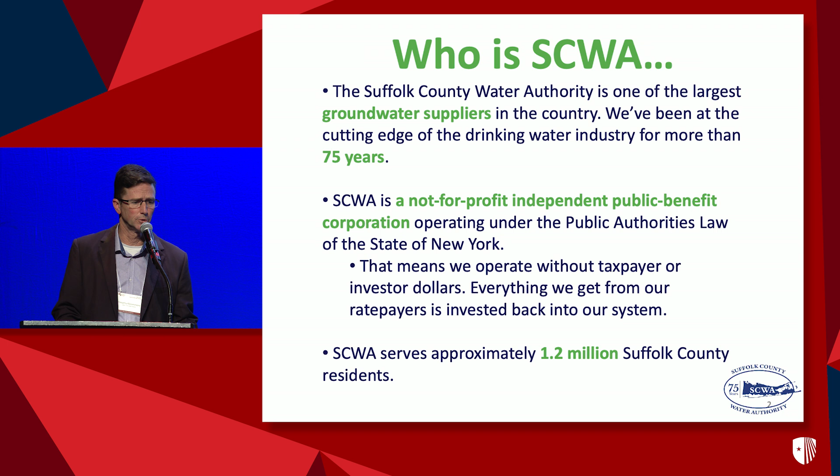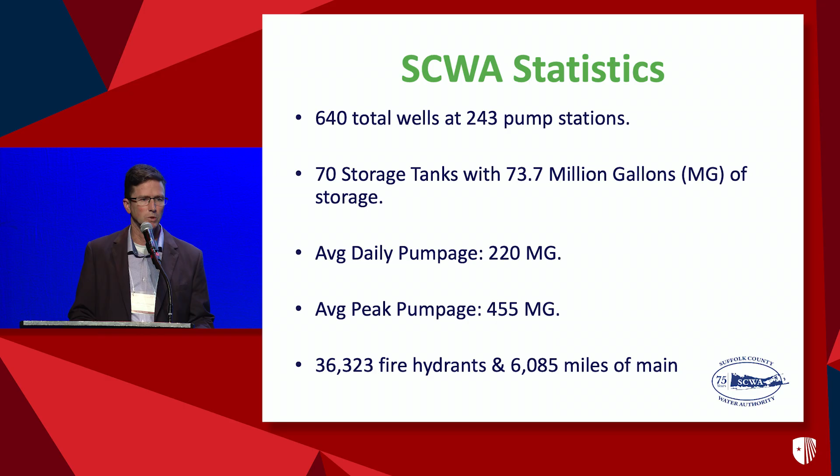We do serve approximately 1.2 million residents. The size of our system, we're a large system. 640 wells at over 240 pump stations. We have a total storage with our tanks of almost 74 million gallons, average daily pumpage of 220 million gallons. And like every other water supplier, we have an average peak pumpage that's much higher than that due to irrigation. It's 455 million gallons a day. We have 36,000 hydrants covering 6,000 miles of water main. So, like I said, very large system.

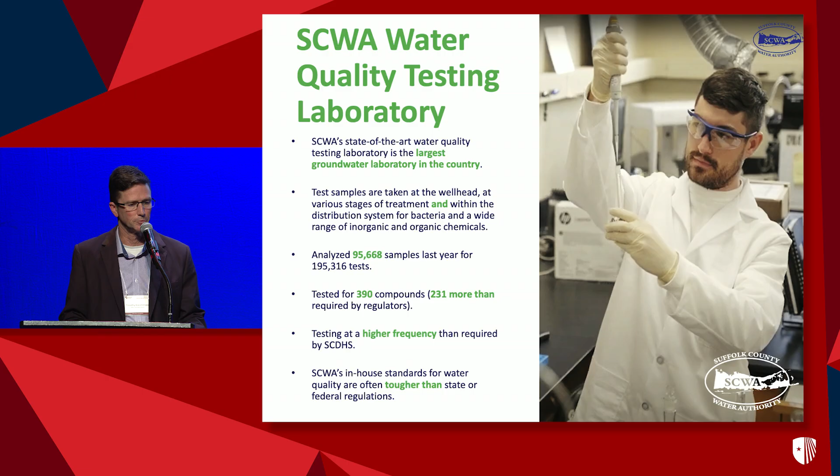So how do we ascertain our water quality? Well, we have our own laboratory, the largest groundwater laboratory in the country. We test and sample at head of pump so we can see what exactly is in the raw water, what's in our groundwater. We test at various stages of treatment, if we have treatment at that site. And we're also testing post-treatment before we go into the system, and finally in the distribution system itself. Our lab processed 95,000 samples last year. Over 195,000 tests were performed on those samples. They're open 7 days a week, 365 days a year. We also test at a higher frequency than we're required to, and our in-house standards in many cases are stricter than what we're required to have.

So specifically on our action on PFOS and PFOA, we began testing back in 2013. The health department, as you know, 10 parts per trillion is the standard for both PFOS and PFOA. The EPA has since proposed a level of 4. We moved right away to try to meet that new proposed lower standard. And so we tried to formalize a plan and have successfully executed it in that we have a mix of treatment and operational restraints that have us in full compliance already, years ahead of the EPA suggested deadline. It went from 2029 to 2031 recently as a proposal.

I would also like to point out that as important as the focus on contaminants is, and it's extremely important for the public and for us as water suppliers, we also need to be able to balance that by letting our customers know that the water is generally safe. And towards that end, 2/3 of our wells, of those 600 some odd wells, don't require any treatment at all at this point.

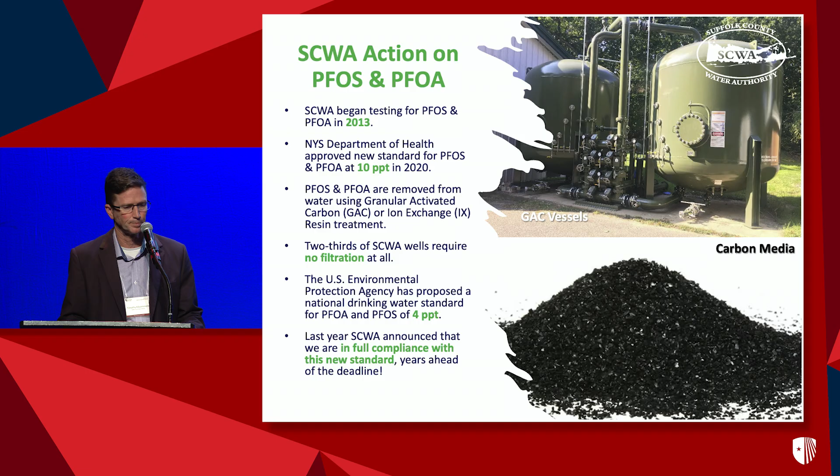So in rolling out our PFAS treatment, we rely on institutions like CCWT and Stony Brook for some of the research that they're doing, but also on our in-house expertise. We have a mobile GAC system that's pictured here after a recent repaint. Those are 8-foot diameter vessels. We've used them in the past for carbon treatment of VOCs and things like that. We sent that out to one of our sites with the highest levels of PFOS and PFOA in the beginning, and we tested different carbons. Real world, let's see exactly which one is going to work best for us.

We've done a lot of carbon research and had kind of standardized around coconut for most things, bituminous for some things, and quickly learned that we were going to be swinging that back around towards virgin bituminous for PFOS and PFOA. So once we had established that bituminous was the way to go for us at this site, we installed a permanent GAC system at that site.

We took our trailer back and we retrofitted using in-house forces and changed it over to an ion exchange resin system. And we talked with our partners, 2 of whom are here today, Jason Heim and Josh Mednick, at the County Health Department. Got approval to use a resin that we were already using, perchlorate resin, that was going to work here. We were able to get really quick approval on getting that into a system.

Get it out on site and start working with it. Found that that was going to be effective for us at that site, changed over to a permanent system, took that system with the same bed of resin, and that's currently treating another well now. So we're able to adapt fairly quickly to these things.

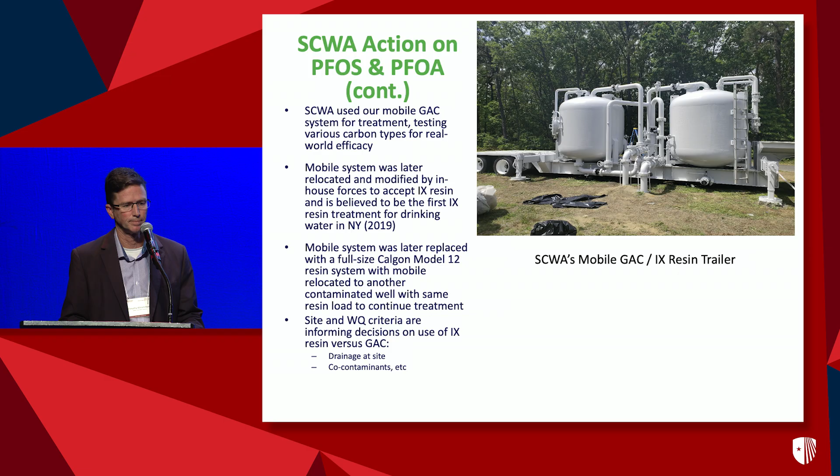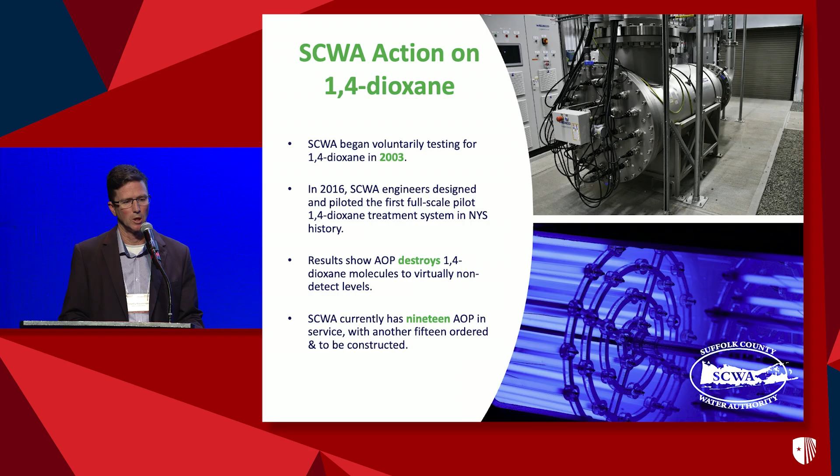In terms of 1,4-dioxane and AOP, we began testing for 1,4-D back in 2003. 2016, we received the first full-scale pilot approval in New York State, treating 1,4-D down to non-detect. We currently have 19 systems. Before we did that full-scale pilot, we actually had done a pilot with Trojan back in 2011 at the same site. So that was the very beginning for us.

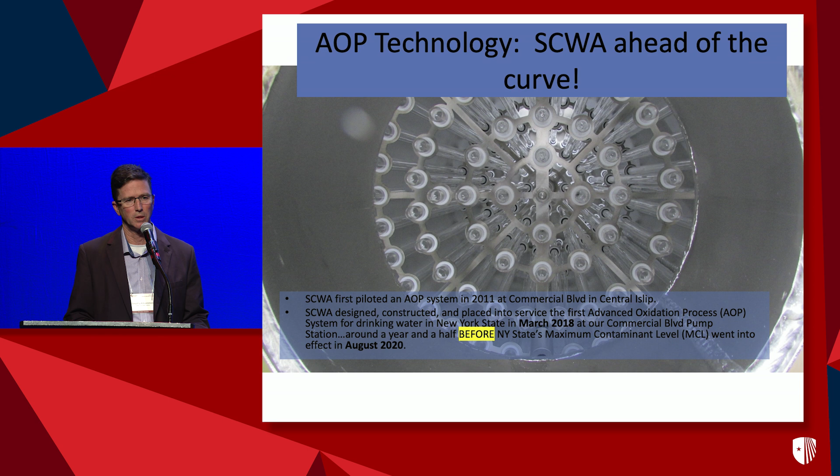And we were able to convert the full-size pilot into the first in-service unit in New York State in 2018. So we were about 18 months ahead of the MCL being established by the state. That's a picture. It's kind of difficult to see. It's a little dark, but it's a smaller reactor that was used on a side stream for that first pilot.

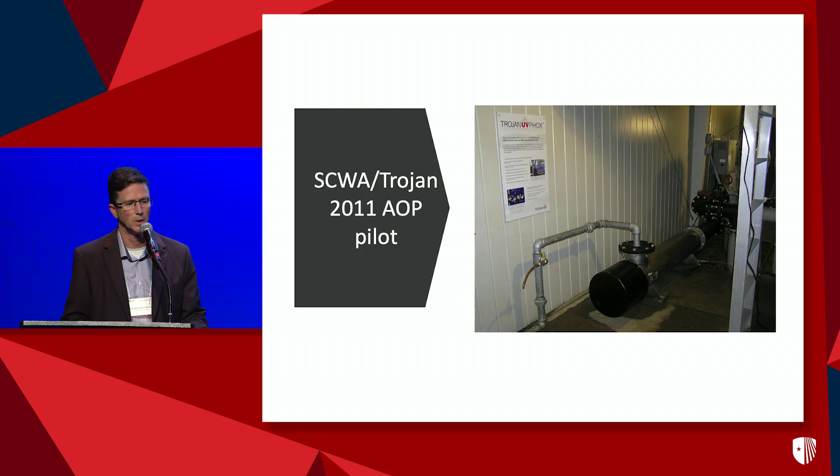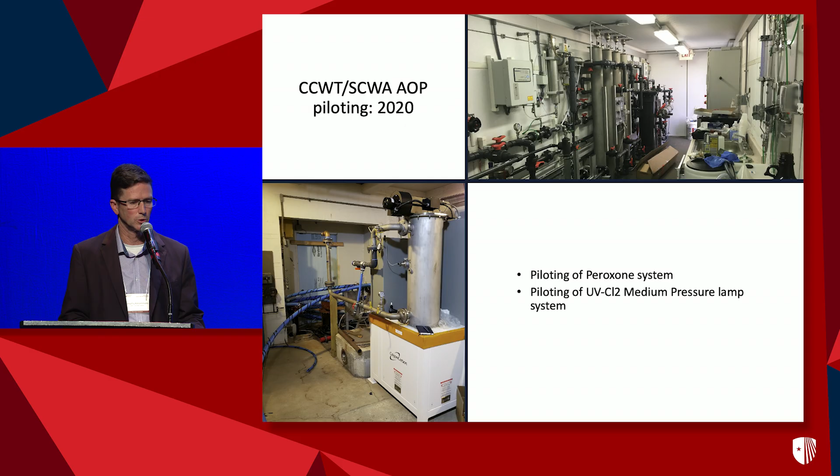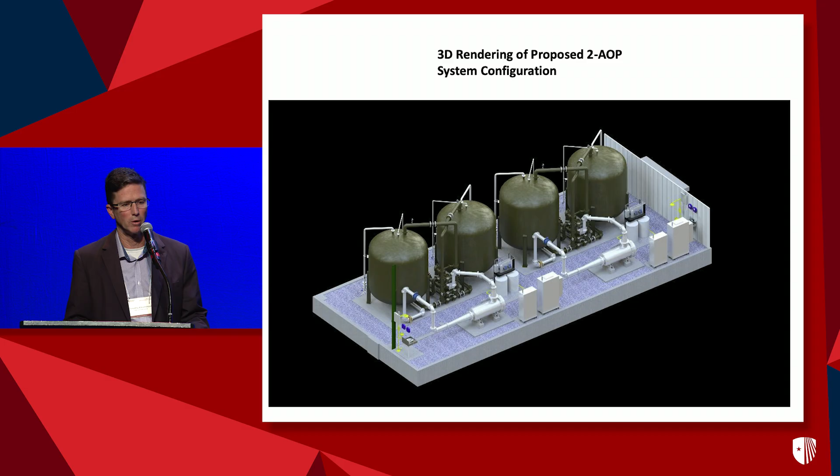And then the designs themselves are constantly evolving. We're trying different things. In this case, we had a site that had a lot more room available to us, which is, believe me, a big blessing. A lot of these sites are so tight, they're very difficult to construct anything on. At this particular site, we had tons of room, so we said, what could we do when room wasn't a limiting factor? Have a larger building.

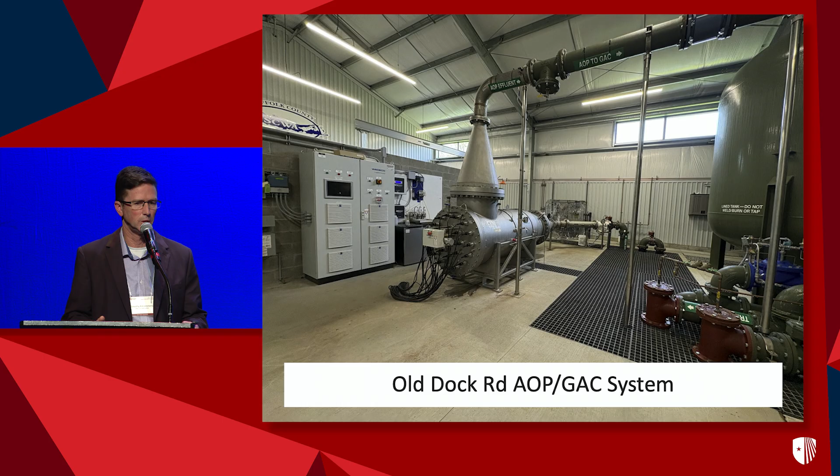We're able to fit 3 AOP systems into this at the ultimate build-out, and we also recessed the piping, that fiber grate you see there. We're able to lower the piping to make it easier for our operators to come in and service the system.

So to summarize our response, it took a lot of R&D, both internally and in collaborations with institutions like Stony Brook CCWT. We've worked with NJIT. We continue to work with UNC Charlotte in characterizing our water to inform our AOP designs. And we've also worked with the County Health Department in getting approval to put out a reactivated carbon contract. And that's a huge thing.

And one of the reasons we're so excited about Project Charlie here is, look, I showed you the budget numbers on carbon, those O&M numbers on the carbon changeouts. Anything we can do to extend the life of the carbon, or if the char turns out to be a substitute for, or just a life extender for it, we're interested and we want to be part of it.

Currently in service, we have 165 treatment systems for PFAS. We have 19 AOP systems for 1,4-D treatment. We have 15 more AOP systems on order. 20 systems are out to bid currently for GAC. And we have 9 buildings where we're just waiting on Health Department approval for that contract, so we can go out to bid on that.

And in the future, our work's not done. I tell my team all the time, we'll never be done with this kind of treatment, in our careers anyway. 91 more AOP and GAC systems, just with what we know today, and obviously there's more that can be coming at any given time.

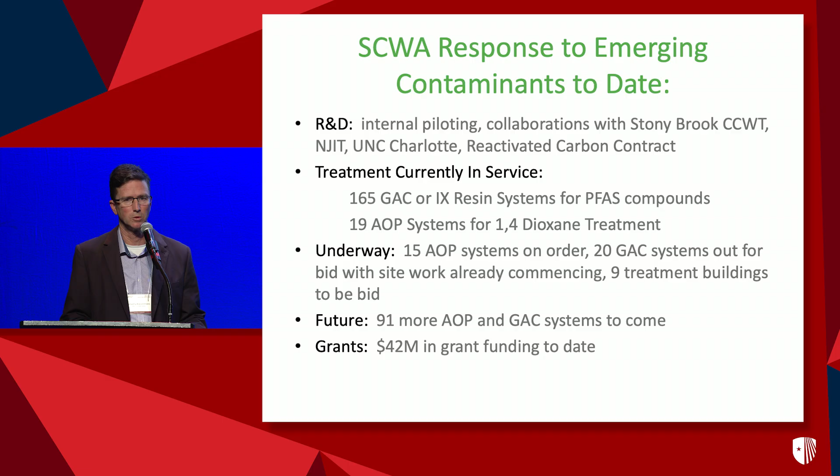And in the interest of providing the best bang for the buck for our customers, we've been extremely aggressive in going after polluters with litigation for both PFAS and for 1,4-dioxane. We're also pursuing the grant opportunities that are available to us. New York State's been great with that, and we have $42 million in funding just to date.